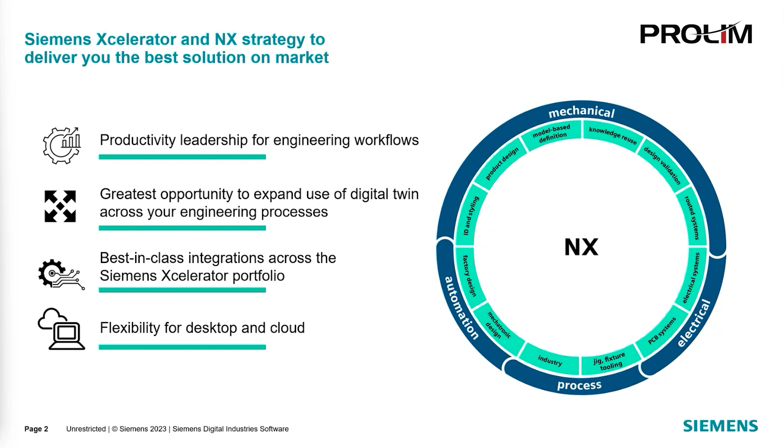So we're going to start off by sharing a little bit of commentary from the market. This is a comment from earlier this year from CIMdata. And this theme of innovation is something I'm going to keep coming back to in my brief presentation here. It's showing how we're continuing to innovate in this space in the service of helping our customers.

So this is a quick roadmap of kind of where we've been and where we're going in 2023. We have a major NX release every 6 months, every June and December. And then we have continuous releases and monthly updates in between. So NX is always up to date with the latest enhancements, new features, bug fixes, and everything else.

We launched NX 2306 in June, and we're ramping up for our NX 2312 launch here in December. As a matter of fact, we're in the middle of our early access program right now in Costa Mesa, California. That's currently happening.

We're also finding ways to innovate and use machine learning and artificial intelligence to improve our productivity. NX was actually shortlisted for corporate innovation in the world's only independently judged AI awards, which are the Alconics. That was a couple years ago. And NX is the only CAD system with an adaptive AI-based user interface. And that user interface adapts and personalizes user interactions, so it makes them easier and faster.

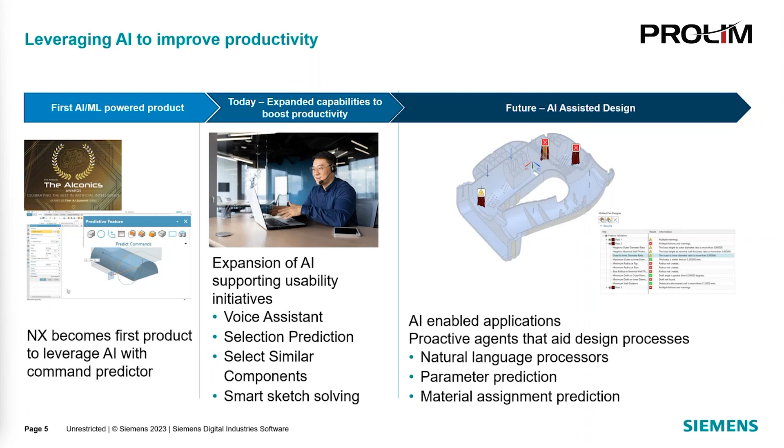Visualization helps to prove the digital twin. It gives you an accurate representation of what your design is going to look like in the real world. So that means better designs the first time and fewer physical prototypes. Siemens Visual Material is our take on a standard physically based visual material that enables consistent sharing of visual representations across all of the current and future Siemens applications.

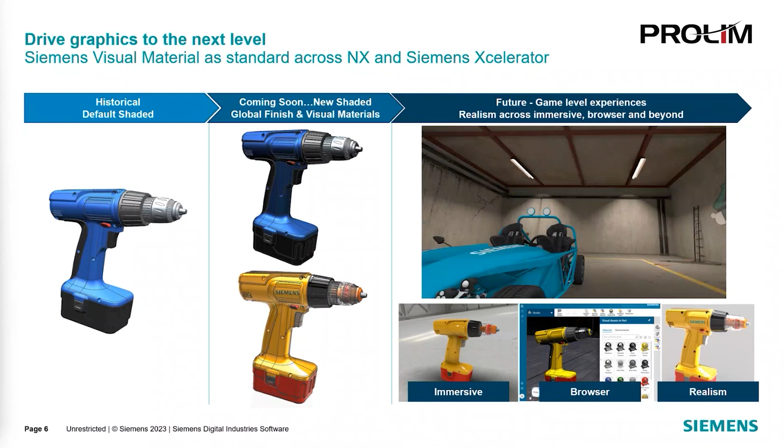And going forward, we're going to bring this high quality visual representation to all the platforms. So not just NX and Teamcenter, but in the browser and even in virtual reality, as you can see in this video here.

So as products become more complex, the need for strong collaboration is only increasing. Electric cars, for example, combine mechanical, electrical, electronic, software, and more with complex cooling and chemistry requirements. So we've progressed from basic check-in, check-out functionality to the point where we currently support real-time change monitoring and notification.

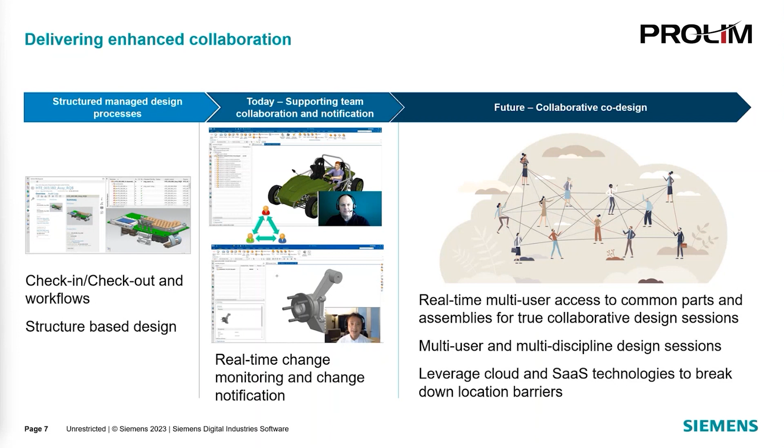In future releases, we're going to support true collaborative co-design, where multiple users will have access to the same parts at the same time. That can include different disciplines as well, so the electrical and mechanical designers can collaborate in real time. We're also leveraging cloud and SaaS to help designers collaborate wherever they're physically located.

As we see it, one of the biggest advantages of NX is flexibility. And that's reflected in our open philosophy that enables you to use the best tools for the job, no matter what, and our excellent multi-CAD capabilities as well.

That flexibility also applies to how NX is deployed. You can deploy it on premises where everything is on site and you manage the setup, updates, and everything. Or you can use our cloud-based option, NX X, where we manage the licensing, configuration, and updates for you. Either way, you're getting the same user experience and the same data format. It's all one NX delivered to meet your needs.

We're also constantly developing new applications using the NX data model. One of the ways we deliver them is through flexible value-based licensing, or tokens. Tools like electrical and mechanical routing, rendering, PMI, human modeling are all accessible from the token pool without having to explicitly buy those modules or those add-on modules.

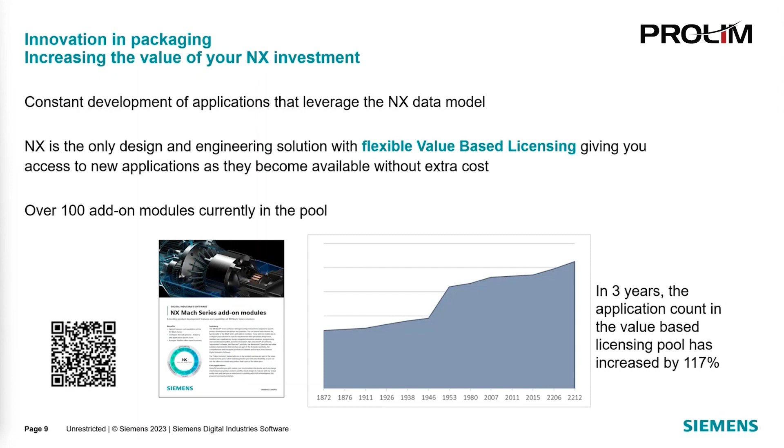That gives you a lot more flexibility than before. You can only run what you need and when you need it, and you don't need to make separate purchases. And you have access to new products from day one. We've increased the applications available in the token pool by about 117% in the last 3 years. Now there's over 100 products in there.

So there's an idea in the market that there's not a lot of innovation to be had in the CAD space. People think that CAD is a commodity, and how much better can you make it? But we've had quite a few patents in the last few years, 25 of them in 2022 alone. So I think we're showing that there's always room for more innovation. Our competitors are not talking about this because they don't have the record to stand on that we do.

We also delivered 519 customer enhancement requests in 2022. So this goes back to the continuous release idea of being able to have access to these enhancements right away. It shows that we are refusing to let our customers fall behind. So if you have a customer that's only a few releases behind, they're missing out on all these innovations, all these enhancements, all these fixes, and everything else. And it also shows that we're listening to them.

So we've seen, again, our competitors are not necessarily listening to the customer as well as they could, and that was a major factor in our recent win with Hyundai Kia.

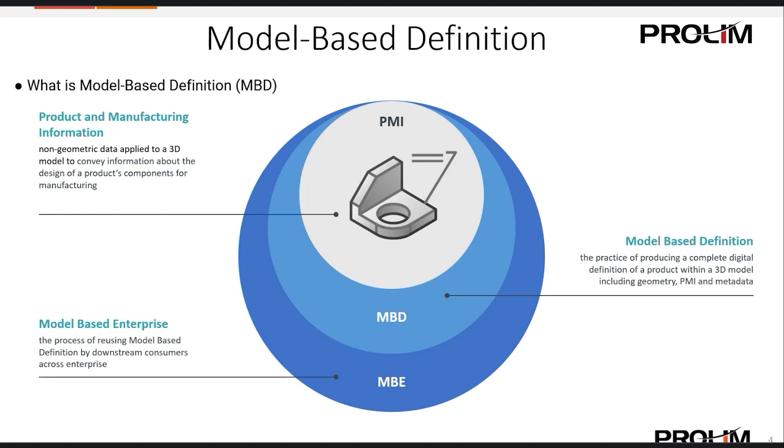So for today's presentation, we're going to be using NX 2306. That is the latest release that was released in June of 2023. We'll be looking at the NX product manufacturing information, PMI. We'll start off by doing some dimensions. We'll do a basic dimension, some hole callout, put some tolerance to it.

We'll then get into some annotation. We'll do a feature control frame, put some datums on it. And then we'll look at a couple little things for supplementary geometry, such as center lines and section views.

Now we're back in NX. Let me go ahead and first show that I am using the latest and greatest. If I go to Help and About, you can see I'm in 2306, which came out in June of 2023. And the first thing I do want to show here is that we now have a new tab over here on the left-hand side, just for model-based definition. So we'll be going in and utilizing this throughout the

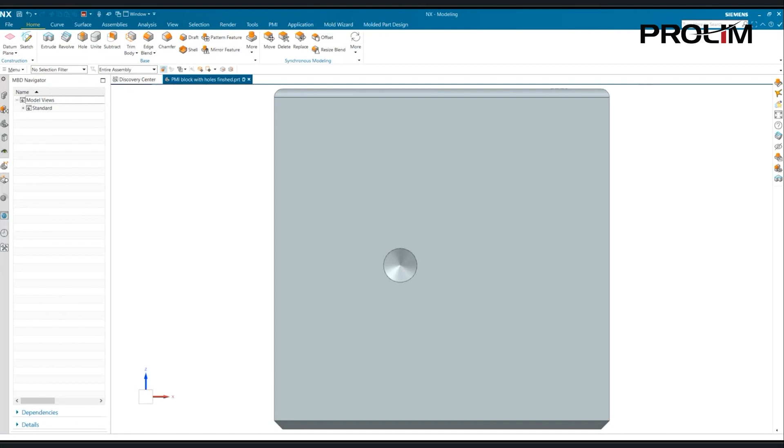webinar here. And you'll see here, it is still done inside the standard views, but you don't go up here into your part navigator and go to your model views here. You actually have this new tab right here that allows you to go in and easily see the tree that you're creating when you're going in and creating these PMI.

Okay, so we're going to be using the toolbar over here, like I just said, and we're going to start dimensioning this out like we would in drafting. However, we'll be doing this in a model view, so we'll be in 3D. So up here in my PMI tab, you'll notice that I have my dimensions here, which if you worked in NX drafting, you should be familiar with a lot of these commands.

We then have our annotation for control, feature control frame, datum feature symbol, and so on. We have some tables that we can insert, some supplementary geometry, such as we can go in and actually add a section view to this. We can do some region, we can do center marks, we can do bolt circles and such. And then if we look here, we'll have our technical data that we'll be adding later on and some rules. And we have a query and advisory here.

I'm going to go ahead and start dimensioning this. The first thing I'm going to do is hit my rapid. When I come in here and do my rapid dimensions, I'm going to come in and select my two faces. I want to select my faces because these are the important ones if you're using this downstream. So here, as you can see, very similar to NX drafting.

The only difference here really is I can pick a different plane if I want to have it on a different plane. Additionally, I'll come in here, I'm going to add some tolerance to it. I'm going to also add how it's placed. Now, if you want any of this to be standard, just like in drafting, you'll go into your customer defaults and your preferences, and you may create a template file. But for today, I'm going to go ahead and utilize what I have here, and I'll show how you can inherit that from one dimension to another.

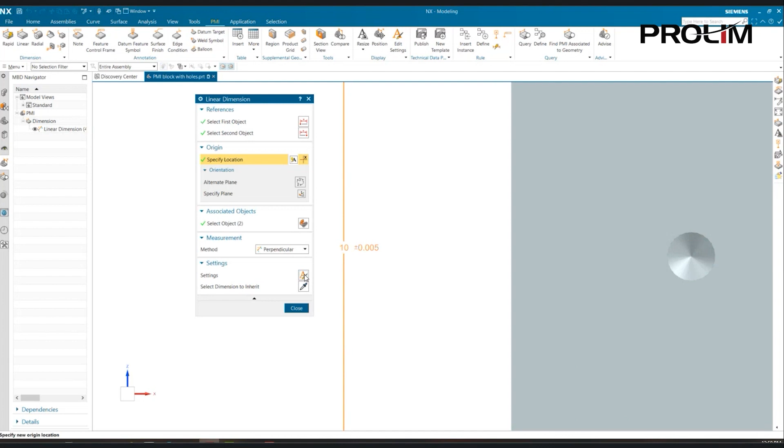So I'm going to go ahead and place my dimension. You may notice that that dimension does not have trailing zeros. That's part of the preferences that you could add. So if I came in here and I went to my settings, I'm going to add the trailing zeros to my part here, and now I have my first dimension. If I rotate this, you'll see that this is a dimension that is in the 3D environment.

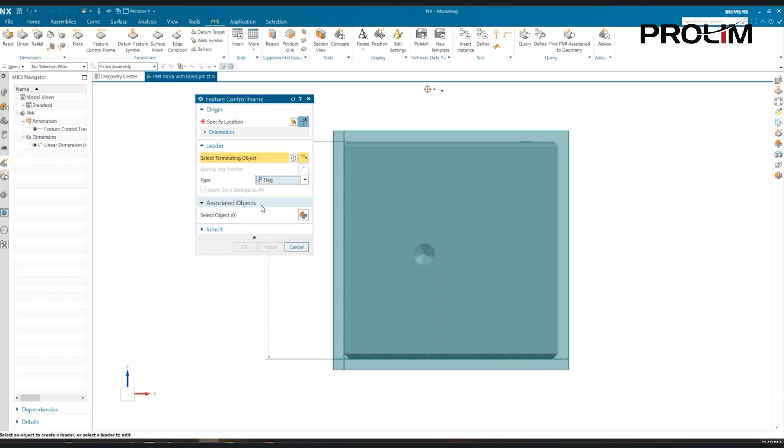My next thing I want to do is I want to add some feature control frames. So I'm going to add some GD&T to this. Now this has changed from the last version. So from 2007 to now, the version has changed a little bit. You will no longer have your annotation in here to go and put your true position, flatness, parallelism, and such. What you'll need to do first is you'll go into your leaders here, and you'll go get a flag, in this case, because I want to flag it to this.

And I'm going to go and place my dimension, I mean my GD&T. You'll also notice, though, because I put it on that particular dimension, it's selecting two objects. I don't want both objects in this case. I just want the bottom face. So I'm going to go and select that. And I'm going to go ahead and rotate this. Let me go ahead and get that rotated properly. Oops, that's my bad. Sorry about that.

Now we have it rotated, and I can see where I'm going to place my GD&T. I'm going to go and place my GD&T in this manner here. And I have not put any of the GD&T yet. All I did is placed where I want my GD&T. Then as soon as I do that, you will get a toolbar up here for feature control frame in general that allows you to go in and put your information.

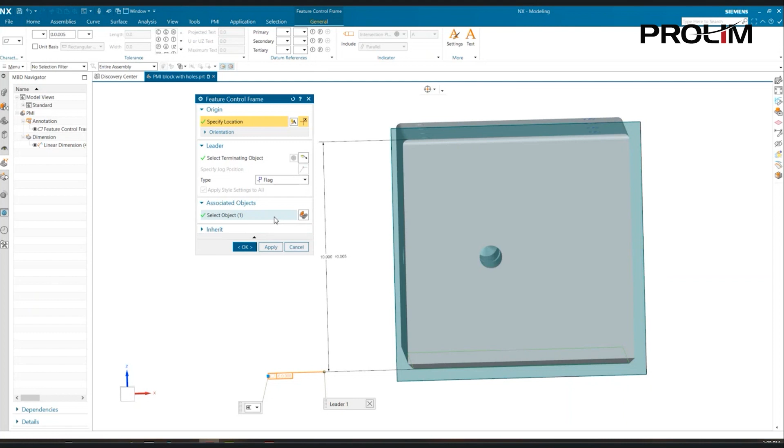So I'm going to pull this down and put a flatness. I'm going to go and actually put 5 thou on this. At this time, if I wanted maximum, or if I wanted regardless of feature size or anything like that, I could add that. In this case, I am just putting a flatness, so I'm going to put 5 thou. If I had a datum reference, depending on what type of GD&T you're putting in there, you'd put your datum reference. So I have my information I want, and I have my face that I want. I'm going to go say OK.

So now I have my GD&T, and I have a dimension. And if I look over here on my MBD Navigator, you'll notice in my standard view, if I go and make this a little bit larger, you'll see that my feature control frame is now here, my annotation, my linear dimensions. If I go to dependencies, it would tell me what is dependent on that. So you can see associated objects, my 2 faces in this case, and it lets me know that that's in the front.

I'm going to continue on dimensioning this out, and I'm going to add some datums to it. So let's go ahead and look at my datums here. Here's my datum feature symbol. I'm going to go ahead and reset this, and I'm going to put datum A in here. So let's go ahead and put A. And I have my leaders here, so you have your different types of leaders that you can put in there.

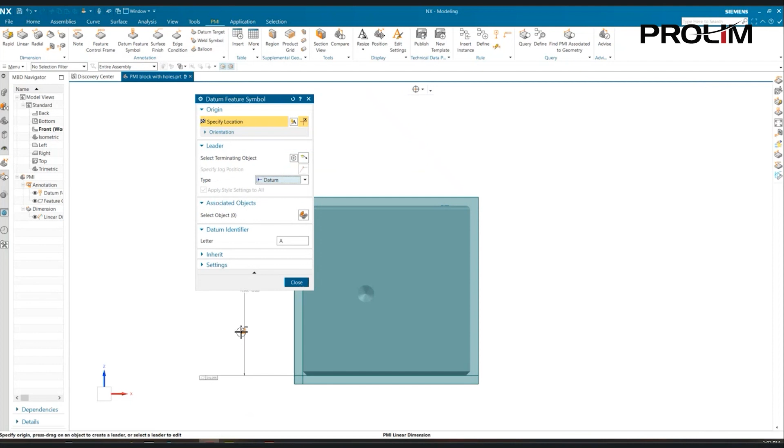Once I have what I want here, I'm going to go ahead and select this particular feature control frame, and I'm going to go and place my datum. So now I have my datum that's also under my annotation. If I double click on that, it automatically selects the bottom object for me because it's going in and selecting my feature control frame. So now I have a dimension I've added, a GD&T I've added, and a datum.

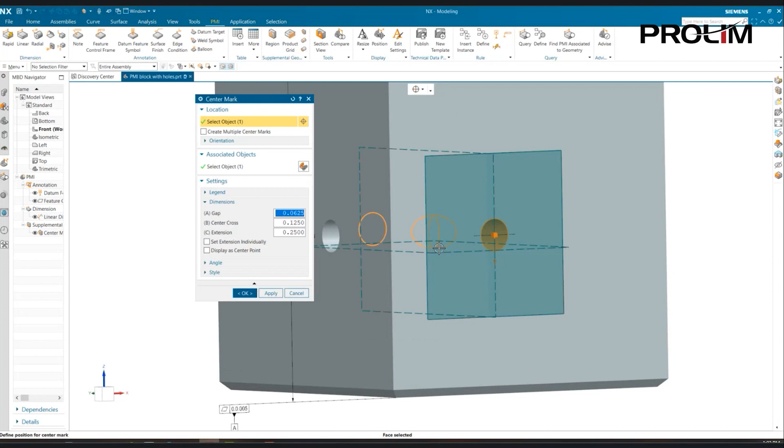Next, I want to go in and maybe I want to dimension the hole there. So with that hole there, first thing I'm going to do is I'm going to go and center mark. I'm going to select my object. Notice I have different planes I could put that on, but in this case, I like where it's at. I'm going to say OK. Next, I'm going to come in and get another dimension. So here I'm using my rapid dimension again. I select my center mark, select my face.

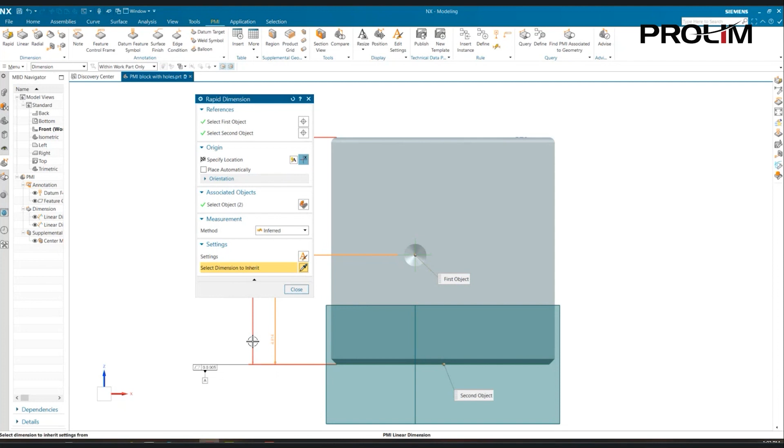And this time, when I go to place it, I'm actually going to say I want to inherit this other dimension. And notice that it gives me the same tolerance, gives me the trailing zeros and everything else. However, maybe I want to put some GD&T to this, maybe I want to true position that hole. I'm actually going to go in and say, I don't want the tolerance. I just want to put a basic dimension on it. Place my basic dimension, and now I have that hole started to be dimensioned.

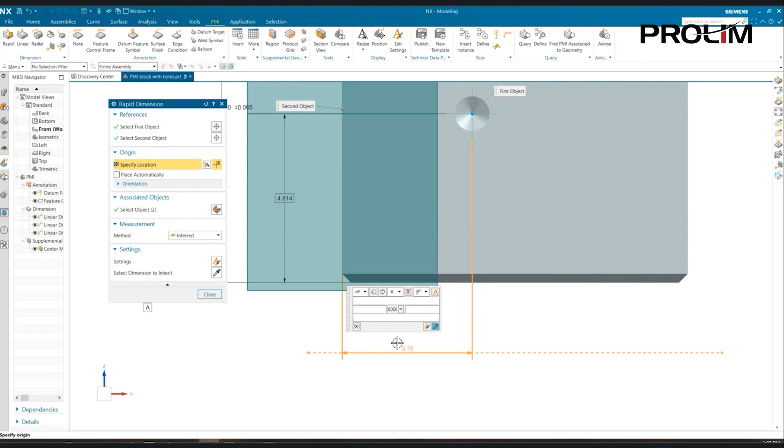Once I have all that information, I can continue on and dimension this the rest of the way out. Let's go ahead and do that. I'll go ahead and put my other dimension here. Whoops, that's my bad, I selected the wrong object. Let's go ahead and reselect my object here. And I'm going to go ahead and select this face here. Place my dimension. Let's go ahead and inherit this information, and place it. And now maybe I want to put another dimension in for the size.

Again, I'll go in and inherit my information. Now, if you have this set up in your preferences or your customer defaults, or if you have a template file, a start part or whatever you like to call it, you wouldn't have to keep doing this. In this case, I'm out of the box.

Now let's go ahead and put another feature control frame. This time I'm going to put another flag on it. I like that. I'm going to select this edge and pull it down. Once I have where I want to place it, you'll get this toolbar up here.

In this case, I want to have a true position. So I'm going to go ahead and do a true position. We're going to leave it at 5. I'm actually going to put a diameter on that. My primary datum is A, let's say. My secondary is B, and my third would be C.

So now I have my true position there. Well, in this case, guess what? I did it wrong. I want to have that perpendicular, not a true position. So you can always come back and change that.

I got ahead of myself there, actually, and tried to put true position on an edge. In this case, I wanted to do the hole like that, but that's all right. I went and quickly changed this.

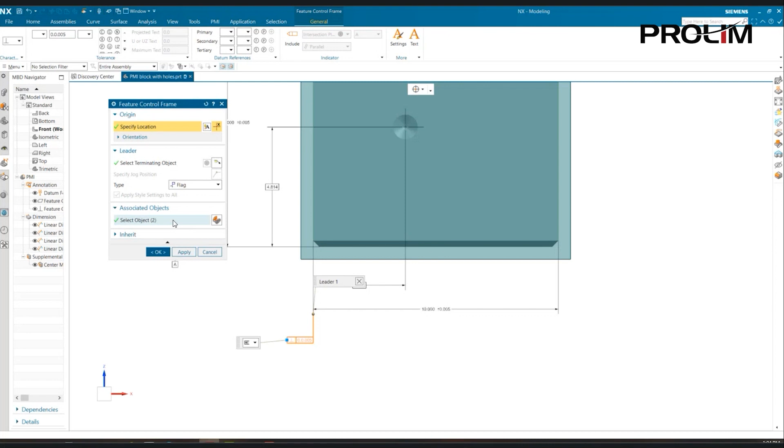And once again, if I say select objects, you'll notice that it picks both faces. In this case, that's not what I want, so I'll go and deselect this one, and I'll go and place my perpendicular. So I have my perpendicular placed, and you can see here over in my tree, it continues to build.

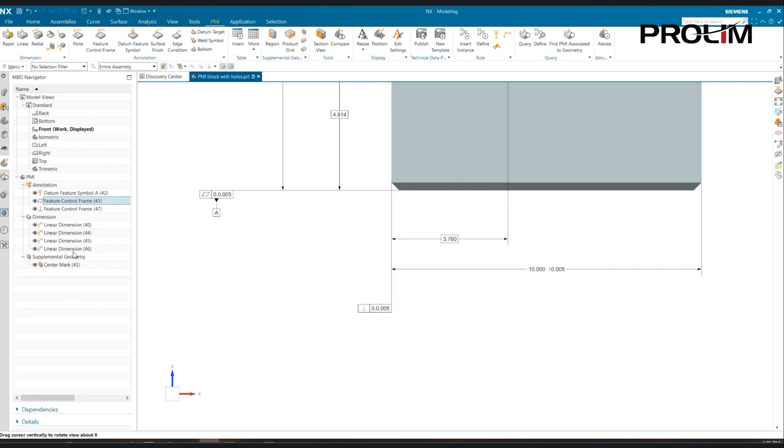And if you want to at any time see where that is placed, you can go in there and you'll see the status. That status lets me know that there's PMI in that particular view. And as I showed earlier, the dependencies will show you more information, the associated object and the model view, and also what is maybe stacked to that.

We'll go ahead and continue on this. I'm going to go and make that a datum myself also. We'll go and make that datum B. Actually, reset that real quick and go datum B. Take my leader, select my object, place my datum B.

So now we've gone in and we put some basic dimension. We put some dimensions over all sizes with some tolerances, some GD&T. And next, maybe we want to put dimensions for the hole there.

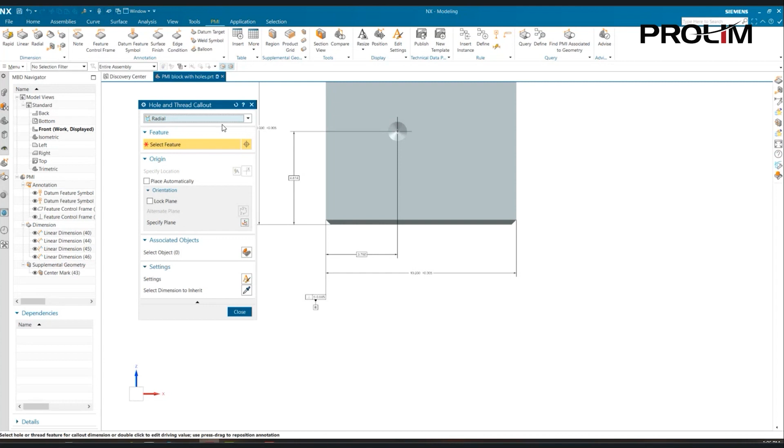So up here, we have hole and thread callout. Much like the drafting side, I'm going to go ahead and pick that. I have radial or linear. I'm going to go ahead and say linear - I mean radial in this case. Pick my hole, and once again I go and place it. And you may notice that may not look like you want it. That again depends on your preferences or your customer defaults that you may have.

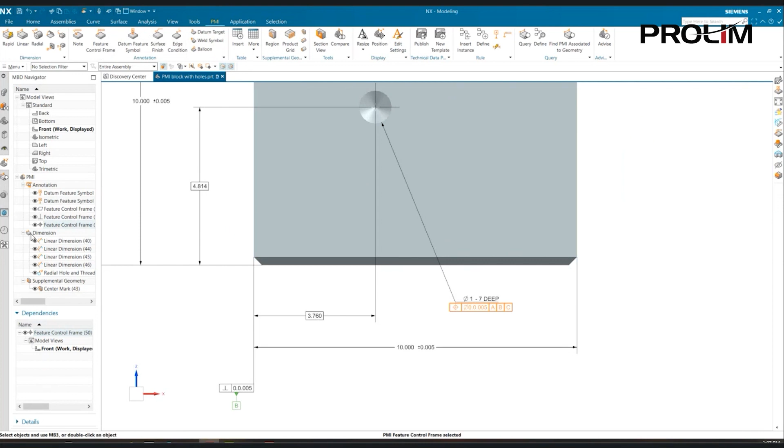Now I'm going to go and put that other GD&T for the feature control frame. In this case, it will be my true position that I tried to place earlier. And we'll go ahead and put that information in there. You can quickly see if I select on that, I can always come back and quickly double click on it and change that information, such as what I did earlier. So now I have this pretty good and pretty detailed out, pretty decent.

So we've gone in, we did our dimension with basic dimension. We did a hole callout, some annotation, feature control frame and datum feature. And then we did a supplementary geometry with our center line. Now what we may want to do next is, if we look at this, we have two holes here and they intersect each other. Maybe we want to have a section view.

So if we come in here and say section view, notice this section view is very similar to what you would have if you were in model and if you've ever done any section views in there. And here I can pick my different planes and such, display, cut, plane and everything else, cap settings.

I'm going to go ahead and rotate this, and I'm going to get it in the orientation I want, because this is going to be saved as a model view. I'm going to go ahead and OK this. And now if we look at our section view here, we got our section view.

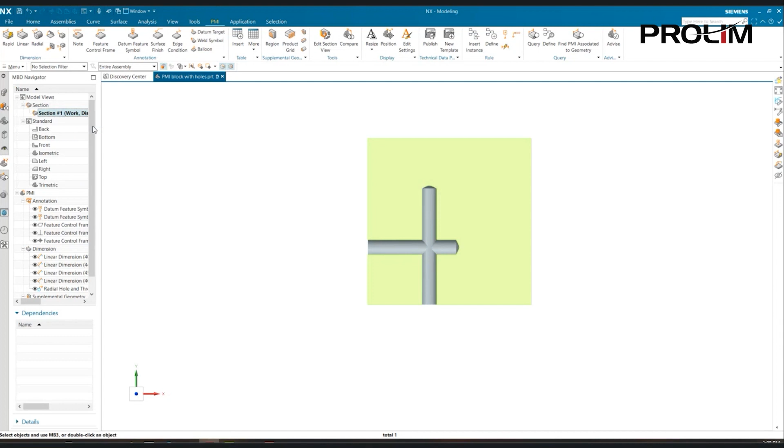If I wanted to add cross section to it, we can go in and edit the section view here, or we go into the settings and display the cross hatching.

Now, as I said, this is done in model view. So if I go back to my front, you'll notice that inside my front there, you have your dimensions, your GD&T and everything. At any time, if I wanted to move these, I could go and say, let's put this in another view. I have the ability to navigate to the view, display in views, display in all views, so I can move that to any view I want.

Now that we talked about what model-based definition is, MBD, and we've also talked about product manufacturing information, PMI, we went in and showed how to dimension some basic dimensions. We showed a hole call out. We went into annotation, did some feature control frame with GD&T, and then we put some datum features. Additionally, we showed some supplementary geometry with the section view along with the center lines.

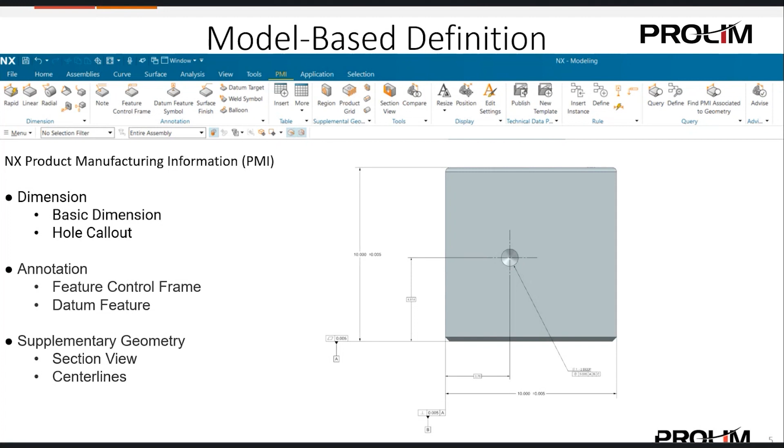Moving on, we're going to start looking at search and report. So we're going to look at MBD query, and we're going to look at a text base. In this instance, you can go in and type in what you're searching for, for example, in the example I show on the screen here, datum feature. Or you can go rule-based. You have certain rules that come out of the box, and then you can recreate a report from this.

Once we do that, we'll go in and find some PMI associated to the geometry. This creates a temporary view that shows you what PMI is linked to which geometry. Then we'll go on and use the advise, which is on the next slide here. I'll show you that when we get to it. And then we'll go to the compare, which is on slide 8.

So now let's go ahead and jump back in NX and start going through some of these. Now that we're back in NX and I have my model up here, let's go ahead and look at the MBD query first. MBD query can be found over here in our resource bar on the left-hand side.

The first one we have is text-based. So within text-based, I can put different information. For example, I can say datum, datum feature. If I say datum, you will see now that it brings up the information here and highlights it on the side.

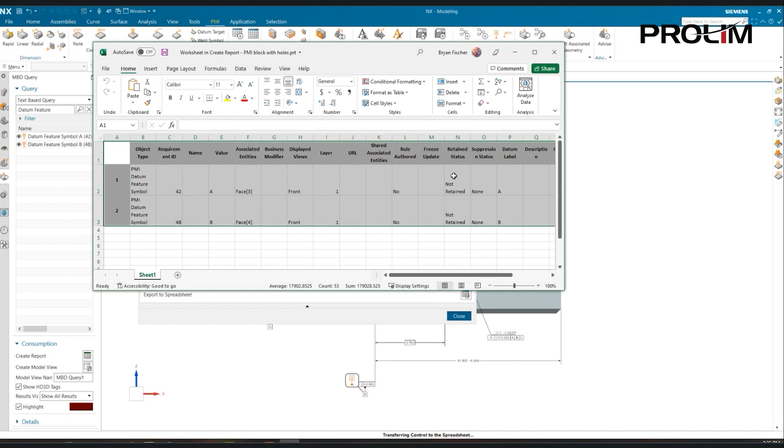Additionally, we can go and create a report. When we go and create a report, we have different information in there. It tells us what face it's associated to and so on. And if we prefer to, we can actually export it out to a spreadsheet. When we go to export this out, it will put it in an Excel spreadsheet. Within that spreadsheet, we have information we can look at - different columns, layers, rules, different things such as that. It gives us a datum label and so on. So this gives you a report that you can go and actually share with individuals.

I'm going to go ahead and close this one. Give it a second to close the Excel.

And the next one we're going to do is let's look at our rule base. So rule base, we have several different ones that we can look at - find dimension, find datum, surface finish. These are all out of the box. So I'm going to go ahead and say find dimension.

It's going to ask me which ones I want. Dimension value, I can actually put a value in there if I choose. So if I said 10, for example, that's only going to find the dimensions that are 10. So from here, I'm going to say OK, and you'll notice that it highlights my dimensions that are 10. You can create a report from there, and you can also create a model view from there. So that gives you the ability to go in there and quickly do a query on your model.

Next, we're going to go in and actually do a find PMI associated to geometry. First thing we want to do is remove this report that we just did. And I'm going to come up and go into my navigator here. Over here on the right-hand side, we have find PMI associated to geometry. From here, I can select.

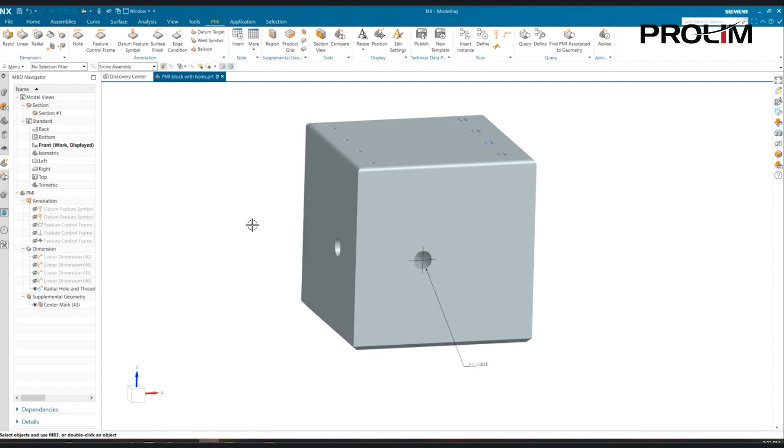Let's just say, for example, I wanted to find PMI associated to this hole. I can create a query result view here if I like, and I can attach to PMI also. So let's go ahead and just say OK for this one. It tells me it creates a temporary display for me, and notice that it only shows the information for that particular geometry. Now you may ask about where's the dimension - well, those dimensions are actually attached to this particular crosshair.

So if we say find associated geometry again, and this time I pick the crosshair, you notice that it will find that. And again, that crosshair is associated to the hole. So that's a quick way that you can find what PMI is associated to which geometry.

So the next portion of this, we're going to jump into what we call PMI Advisor. This check will actually go in and check your geometry for you and your PMI. For example, if you did not have a tolerance on a dimension, it will let you know that. If you're missing a datum reference, it would also let you know that. So let's go ahead and jump back in NX, and I'll run a quick one of these and show some of those examples.

Okay, so we're back in NX here, and I want to run an advisory on this. So up here in the right-hand corner, in my toolbar, you'll notice we have this advise. It validates PMI using the current configuration rules. These rules are set by whatever rules you have for your customer default for that particular file. For example, your GD&T is set to whatever ANSI standard and so on.

So here I have my advise. I'm going to go ahead and select that. And once I run it, notice I get a couple errors here. Now I did these on purpose just to be able to show some of this.

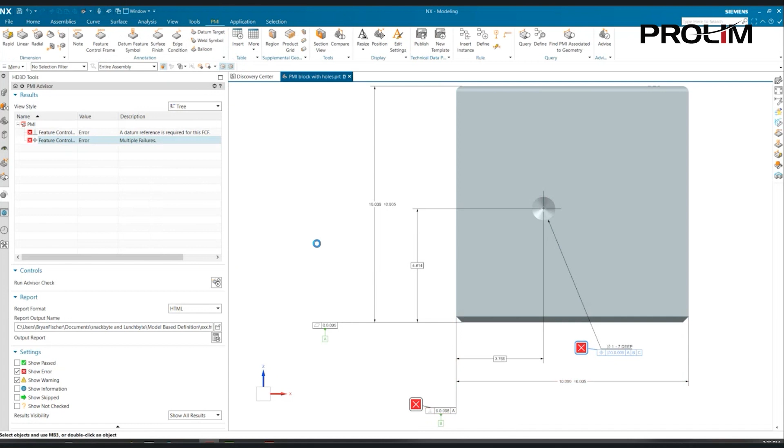Next one here is, notice there's no geometry to it, so I'm going to go and select this hole. Now, datum C is not there, and I have not put a datum C yet. If I came in and quickly just put a datum C - oh, I'm sorry, I hit the wrong one there. That's a datum that allows you to do your A, B, and C all at once. I meant to hit this datum feature symbol over here, and I'll show an example of that next.

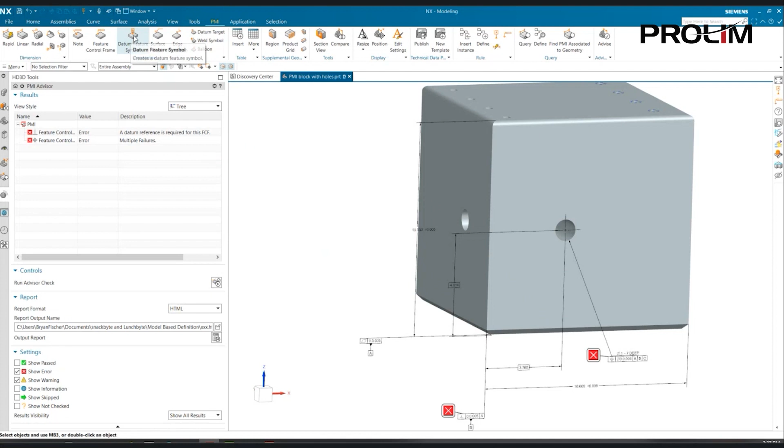But right now, let's go ahead and put this in. And I'm just going to put it on that face. So now I have a datum. Now that's not necessarily the way I would place it, but this is just to show you that it will go through these checks and find these checks for you now.

So I'm going to go ahead and advise again, rerun it, and notice I get no results now. That's because it recognizes that I have this set up properly. It may not be pretty like a drawing, but I do have a datum C that's associated to that face now. And I also went in and fixed the other GD&T.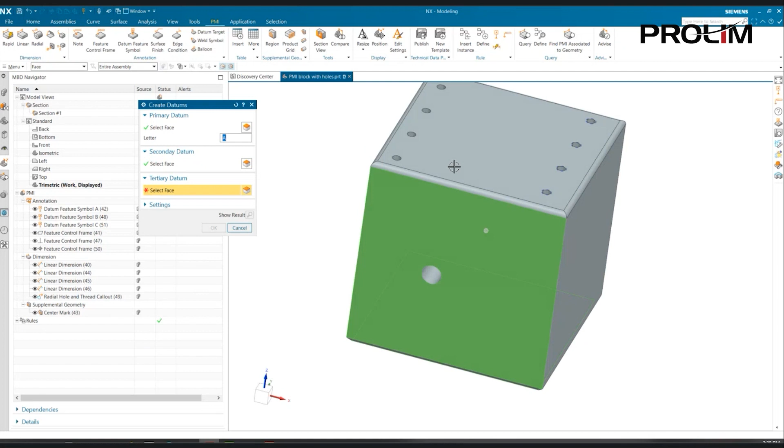Now, I talked about just a second ago how I accidentally went and selected that additional one over here that says datums. This creates your secondary, primary, and third, and you can do that quickly just by going like this. Select datum A. In this case, we had our bottom, datum B, and datum C. It will go in there and actually create them for you in that manner.

I do not prefer that manner myself. I like to make it a little bit prettier than that and like to put it in the views. And I think that's partly because I'm an old draftsman and I had worked on the board for a very short time, but have done a lot of traditional drawings. Neither way is wrong. It's just a different manner of getting to it.

Now, the next portion of this, we're actually going to go in and do a compare of two different revisions. I'm going to go ahead and close this one, and I have two models that I already have that are going to be used for that, two different revs. There have been some slight changes between them, and we'll go ahead and show that. So within the PMI compare, it will go through and look at your source part and your comparison part, and then label the differences between the two.

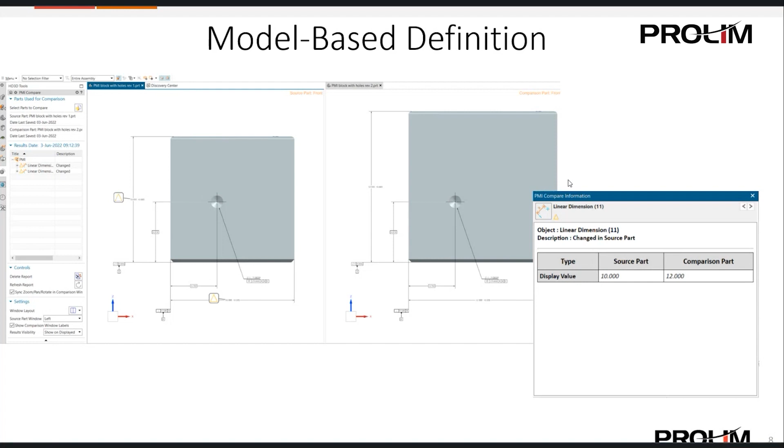So here we are back in NX. As you can see, I have a model for Rev 1 and I have a model for Rev 2. What we're going to do is act as if we're going in to look at these two. First thing I want to do is go into my PMI and see what the two different changes are. I'm going to go to my compare under the tools here. Compare PMI and model views between two different parts or revisions.

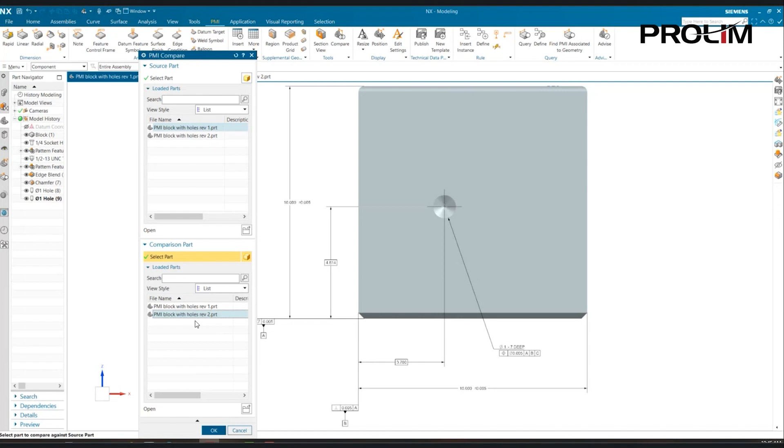As soon as I hit that, it's going to have my source part as the part that I currently have open. If I didn't have it open, I could also search for it if I needed to. And same with my comparison part. For my comparison part, I'm going to go ahead and select my Rev 2, and say OK here. And now it's going to tell me the difference between these two models.

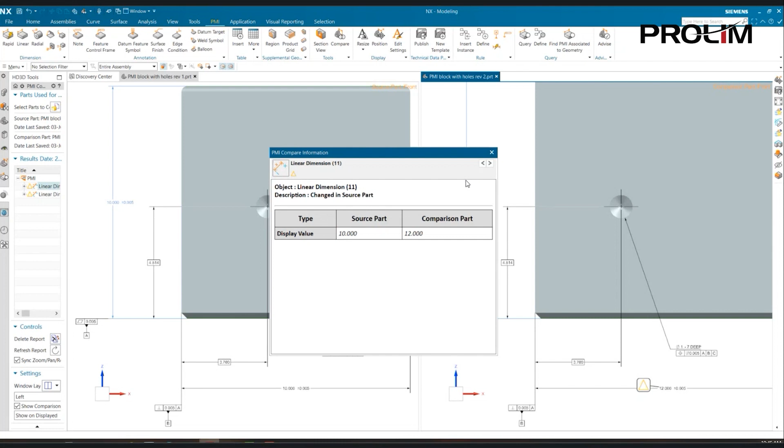So you can see over here, when I make this one my work, it lets me know what the difference is. And if I say compare information, it tells me what has changed. So this is a nice tool that you can quickly use to tell the difference between one rev and the next. It also has information over here that lets you know the source part, comparison part, and what the change is. You can create a report if you like. You can do different layouts for the windows. Additionally, it gives you the last saved date for each one.

So this is a great tool for anybody that may be going back and double checking different revs. So if you're a checker of any type, or if you just need to make sure that the change has been made. This PMI compare is a very nice tool that makes it a lot easier to redline drawings.

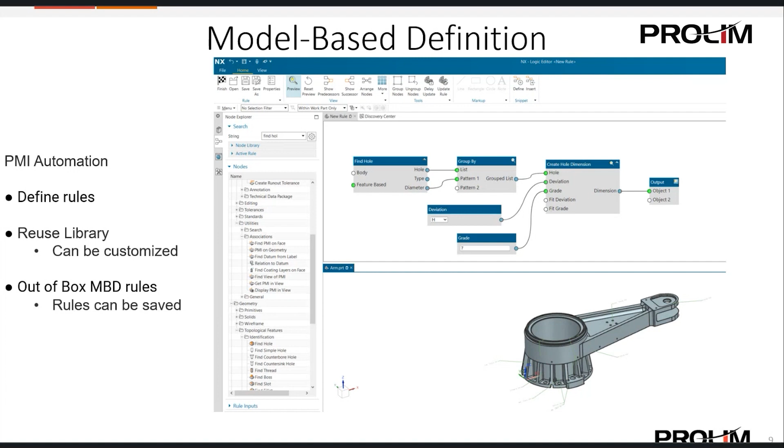Next, we're going to be going into some PMI automation. I'll show you how to define rules. I'll show you how to use the reuse library. And then we'll talk about out-of-the-box MBD rules and how they can be saved. So back in NX here, I have a model, and as you can see, this is a body. I'm going to go in and actually add PMI to this. I've already created a rule, and I'm going to go insert this rule.

After I insert it, I'll show you how we can create this rule and how it can be utilized. So up here in the instance, I have all my rules that I have already created or that are out of the box. In this case, I have an MBD logic rule that I've created for holes. When I select this, you'll see that I can create hole dimensions, I can change the deviation and grade, and so on. I'm going to apply this, and as soon as I apply it, you notice it adds the PMI for me. Now I'm going to undo this, and we're going to create this together.

So we're still in PMI, and this time I'm going to go to define instead of insert. From here, I have several different options. I can go through all the nodes if I like and find what I need. Or if I already know what I want, I can do searches on them. For example, if I say create, notice it gives me a list, and I can start getting this information. So let's go ahead and find a create hole.

Actually, let's just go ahead and type it in, create hole. You'll see right now, I got a create hole dimension. From here, I'm going to go in and actually place this over here by inserting it. And this is the beginning of our rules. So I'm going to go ahead and continue to create my rules here.

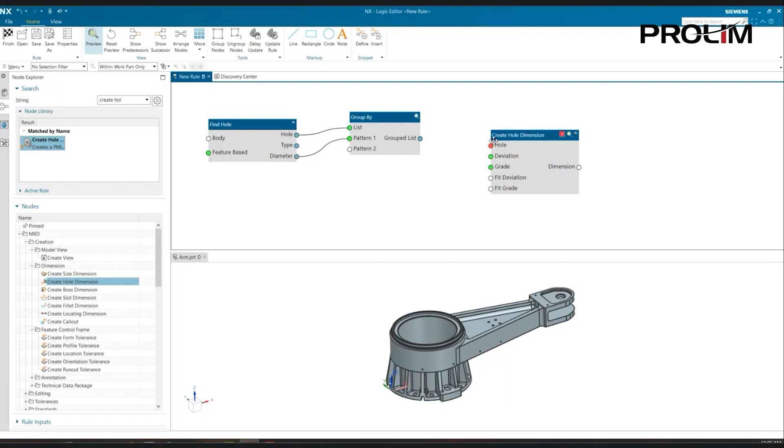I'm also going to go ahead and create a dimension from here to here. We're going to create a path. And then from here to here. So you can see it's pretty quickly done. And once you understand these rules and how to utilize them, you can set these rules for your whole company, and your designers, draftsmen, or whoever can utilize these to actually go in and quickly create information.

Let's continue and fill the rest of these out and put the rest of these boxes, and then I will show you how we can save this and utilize it. So we have our deviation here. I'm going to go and create another input. The deviation, I can tell which deviation I want. Grade, I'm going to create another input. And we get our grade there.

And last, I'm going to go and actually put my output here. And from there, now I have my rules saved. You can see once I put the output in that these dimensions are now on the particular part. So let's go ahead and finish this. Actually, let's go ahead and save this. And this time I'm going to go and save it as a new rule. We'll call it hole 2 this time, just so we know the difference.

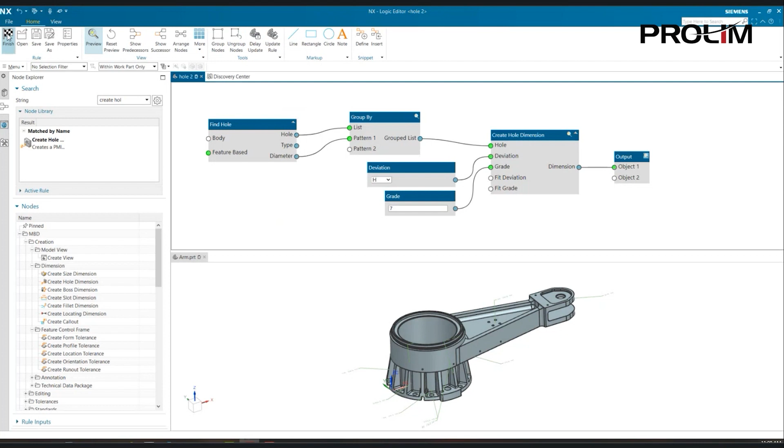Now, if you came into a fresh part, you now have the ability to go into insert instance, and you can come down, find your hole 2 logic rule, and apply that. Now, these rules are saved within the program, in whichever revision you're in, under MBD logic rules. I went and copied my 2007 rules over, and this allows me to reutilize those rules I've had.

Now, out of the box, you do have several different rules that you're able to use. You can create datums, you can create, let's see, dimensions, different baselines, convert to basics. So there's a lot of different rules that you can utilize that are already out of the box. So that will allow you to go in and have your users be able to use the rules and bring this information over pretty quickly.

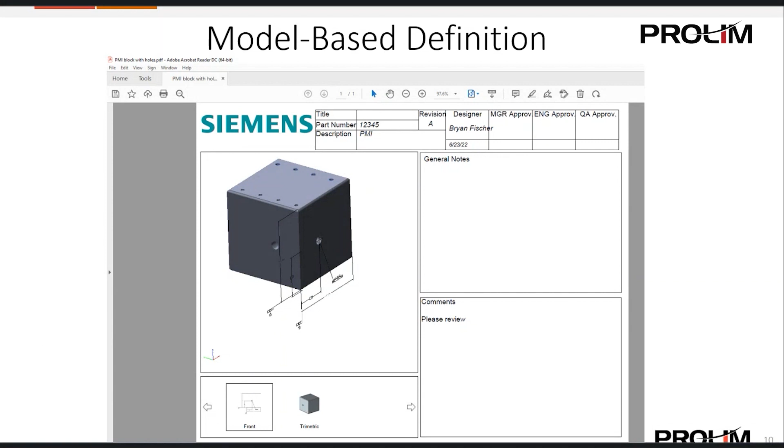For the last part of today's webinar, we're actually going to go in and do some technical data. Here you can see a 3D PDF. We're going to jump back in NX and we're going to create this together. All right, so we're back in NX and I have my PMI block that I created. And within our PMI tab, we have this area for technical data. We're able to publish it here. These are out of the box, but you can go in and create your own under new template.

For today, I'm not going to get into that. We do have another webinar and video that shows that. But for today, I just want to go in and show how we're able to create these 3D PDFs and how quick and easy it is. So here you have your different ones that are out of the box. And I'm going to go ahead and pick one of these. Let's go with the landscape one. Let's go with the part landscape.

So here you have your selected views, all disclosed views, all views. Let's go ahead and say selected views. I'll come over and pick my views that I want. From there, I have my area where to save this. I'm going to leave it where it's at right now because it's going to go in the area I want it to be. And then we have up here new additional tabs. You have your text, so you can put some text in there. And we'll go ahead and put some information.

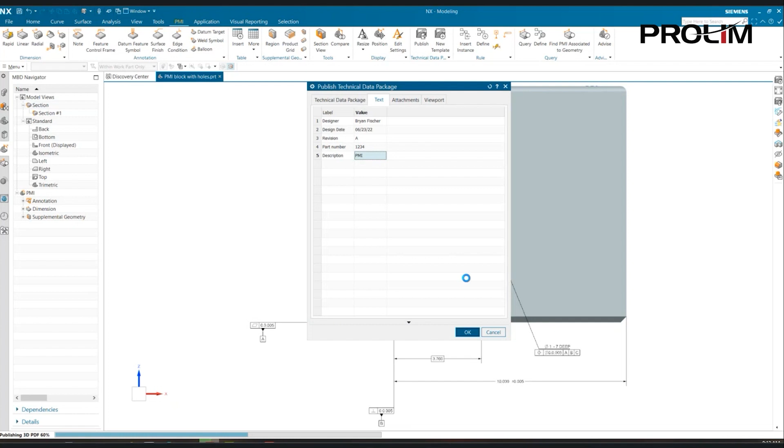And then we'll go ahead and apply this. Now, I'll go in and open up my PDF, and now you can see we have ourselves a 3D PDF. I can rotate this part. I can switch to different views. I can put comments in here.

And now we can send this off to an individual that may not have NX or have a CAD program, and they can go in and utilize this information.

So now we went through all these steps. We talked about what is model-based definition. We went in and did some PMI, product manufacturing information. We did a PMI validation. I showed how to do PMI search and reporting. We did some automation. And then we went in and did some authoring here with our 3D PDF. So that wraps up today's webinar.

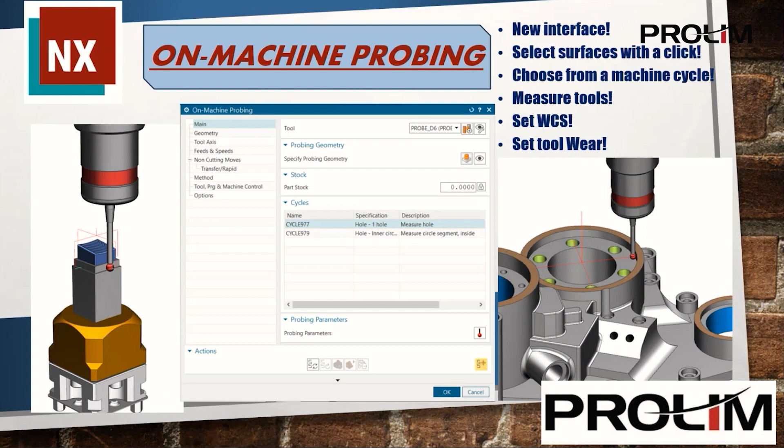My name is Keith Schultz, and I'm going to be covering a little bit about NX CAM, their new probing interface. Let me get my screen shared here. All right, so NX CAM has a new on-machine probing module, and we're going to be talking about that this morning. This is going to be an overview of use, and we're also going to look at getting some additional features to download in NX from PostHub, such as the simulation and the post-support layers.

So this is what we're going to talk about. We're going to look at the Siemens Sinumerik side of things. So on the Fanuc side, there's more features, and we decided to give that its own showcase later. So this is going to be a brief informational presentation to let you see the new interface, and we encourage you to download it and play with it yourself.

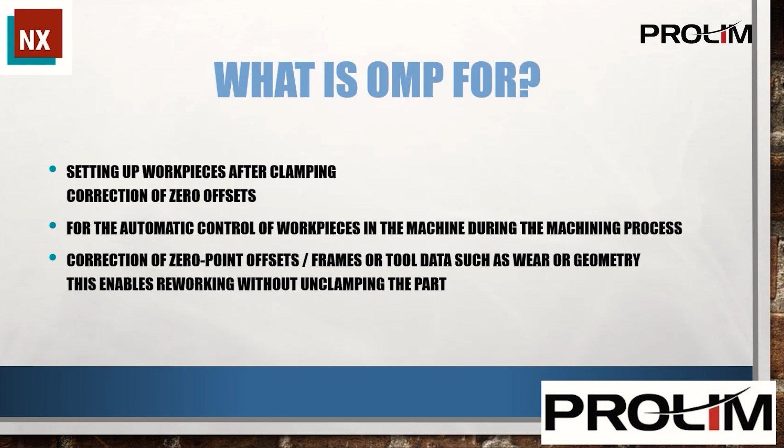All right, so what is OMP? So most of us have probably heard the term probing, and most machine tool manufacturers have provisions for probing. And automated tool setting is the standard for setting our tool offsets. So while NX is not new to probing operations, this new module will help you streamline your programming workflow. So no longer do we need to generate each move separately. So OMP is exactly what it sounds like. It's measuring a feature while it's on the machine tool.

So why use it? Why use OMP? So if you want to digitally expand your machine shop, you can become more effective, efficient, and profitable. A digital shop provides powerful advantages, including reducing our turnaround time. We can deliver high quality parts on time by predicting and eliminating errors by using a digital twin of your part. And we can expand and grow our business by implementing new automation technologies. So probing critical dimensions in our workpiece can reduce our scrap rate by allowing us to measure and adjust processes while the workpiece is still in the machine.

So what does a digitalized workflow for our part look like? So it might look like this. We can probe our tool to check for breakage and update our wear. We can then probe our stock to check for errors in setup, operator or robot tended. And we can make fine adjustments to our work offsets, and we can use logic if it's off enough to throw our operator an error and get that some special attention, right? So after machining, we can probe critical dimensions and adjust our process and have an automated rework process, or we can write logic to alert the operator again.

But in the long run, we can also capture this data and follow the trends for tool life. We can use that to keep our process under predictable control. So instead of switching to a backup tool once we detect breakage, we can determine that, after so many parts, we probably should switch to our backup tool.

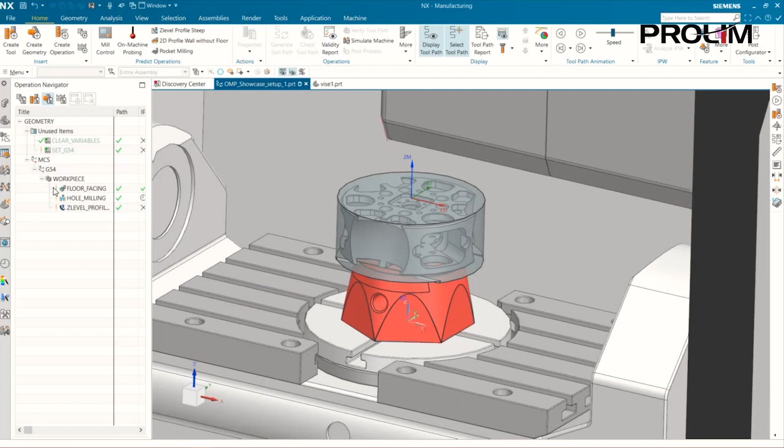So I have my part set up here, and I've determined our workpiece. I'm using the master model process as well. We have our part defined, we have a blank model we brought in defined, and we also have some check geometry. All necessary steps whenever you're setting up an operation.

So first thing we want to do if we want to start probing is create a tool. You see this automatically comes up because I've used it recently, but you can see we have a probe option here. We can make a tool ourselves, or we can select a tool from our library. Those are located in the solid tools in the probes, and you can select between your different library units.

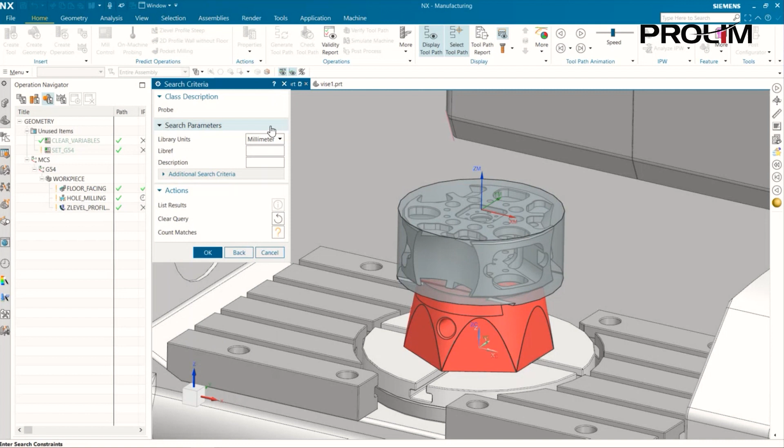And when I say OK to this dialog, you'll see that 2 probes show up, and we can select one of these. Now, if you have to create your probe, you're going to have to give it its mounting location, the length from the mounting location, and you're going to have to identify the tip.

All right, so now let's create an operation. I'm going to switch over to my program order view, and we're going to start creating an operation. I already have probing set up, but you can see that's going to show up over here in your type. And I'm going to put that into our probe work offset. This will be one of our first operations we do. My tool is a probe, and our geometry is going to be workpiece.

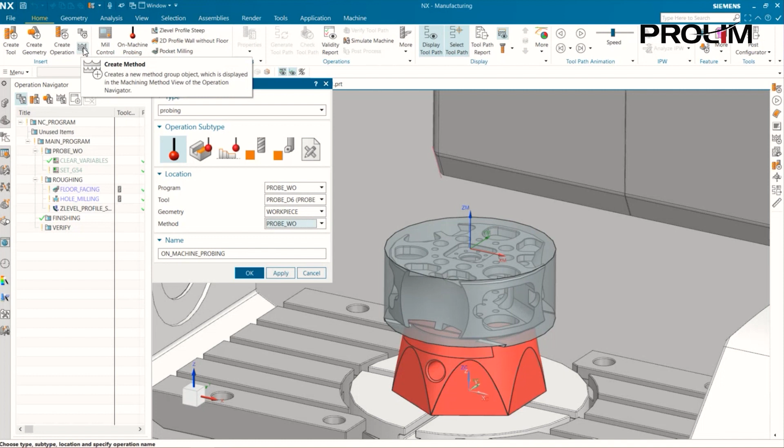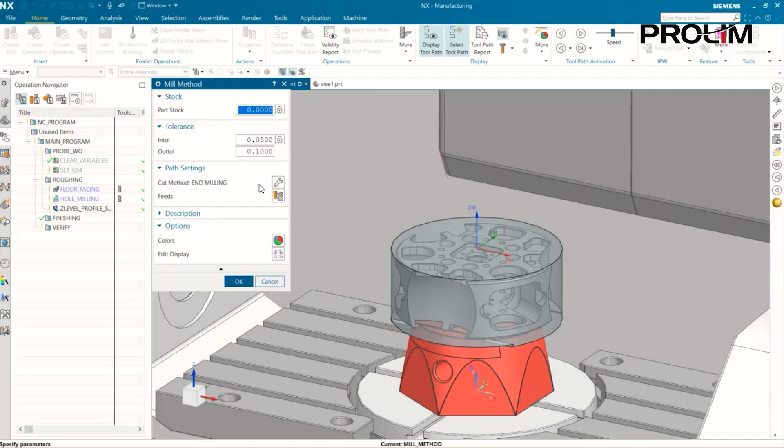And we're going to use a method here, and this might seem a little different to you. I've created a method, and I'm going to show you real quick how we use these methods in probing. If I come over here to create method, what you see in here is we can have our tolerances, and we can also put our feeds in here for our probing. Depending on what type of probing you're doing, if you're just locating stock and setting your work offset, you might not need a very small tolerance. You might need a bigger tolerance. But if you're programming to look at a feature and make sure it's within tolerance, you might want to change these numbers to whatever your tolerance is. So that's how that works.

All right, so we have all of our 4 parents populated, and we're going to name this operation our find Z. Very common thing we do first. Select OK, and we see the new dialog box. So this is how the workflow works: we're going to select our geometry, a cycle is going to show up, and then we're going to hit our probing parameters, and that's where we're going to do our changes to our cycle. So for now, I'm going to select this top face of our stock and OK. And here we go. We can see 3 cycles that show up.

And if you hover over each one, you'll get a description and a cycle number, which is also over here, of course. There's a single edge. There's aligning a single edge. And there's aligning a surface to a plane. So right now we're just trying to find and set Z.

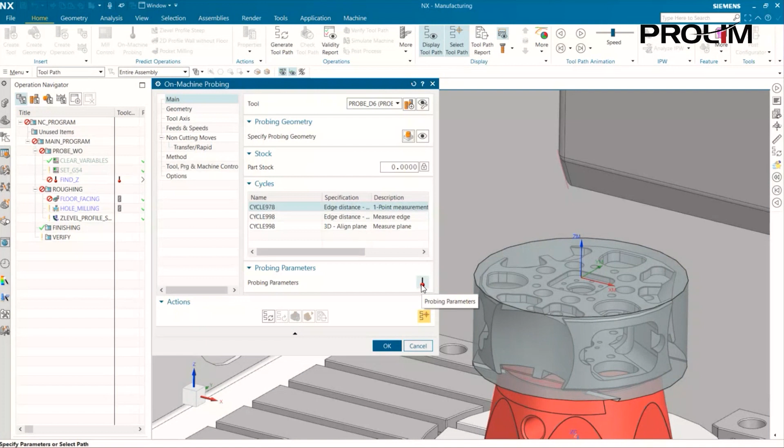We're going to stay there, and we're going to go into our probing parameters. So looking here, we have a whole bunch of locked boxes. Let's unlock some of these and see what we have in here. Set them all to user defined. And the first property to do is a measurement point. Right now it's going to be the center of the part, but I'm going to just move it off the center of the part just so we can see that the tool path has already been created.

And we're going to select our offset target, and we're going to put that as our work offset. You see a couple more windows open up, so let's go ahead and unlock those. And we have a few options here, either our active work offset, or this is for kinematic control. And you can see that we have all the available options there for the controller. I'm going to select G54. All right, we're done there. I'm going to select OK and generate the operation. And there you have it.

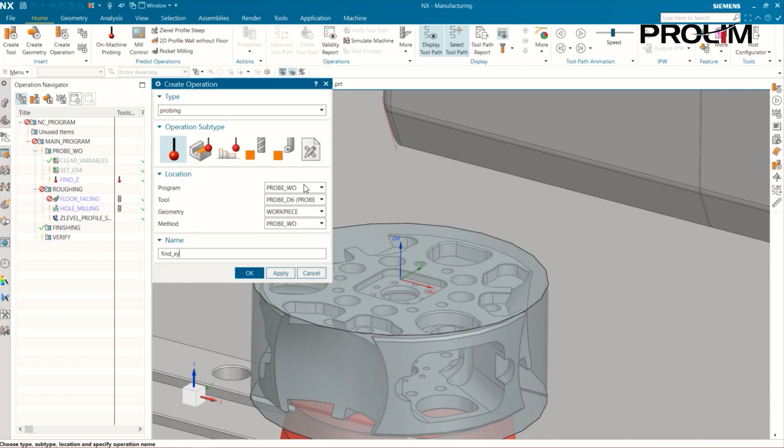So the next thing we might want to do is find the center of this stock in X and Y. So we're going to create another operation. We're going to call it find XY. And everything else is going to be the same. The program is going to be in our probe work offset subprogram. We're going to be using our probe again, and the workpiece, and we're going to use our probe work offset method. Once again, the same workflow applies.

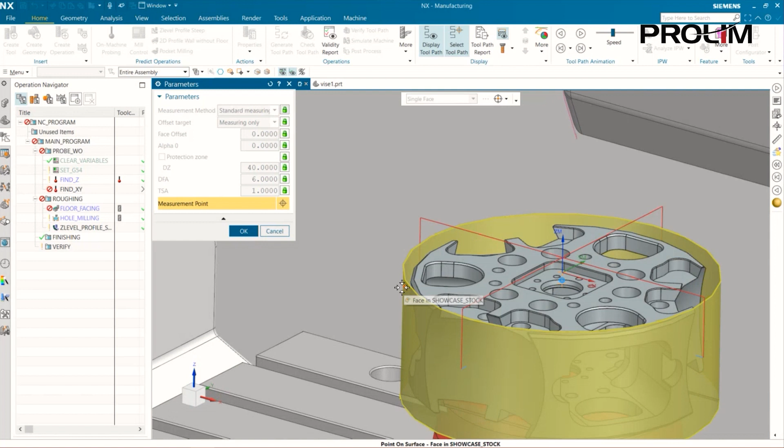We're going to specify our probing geometry. It's going to be outside of the cylinder, and it'd be the same thing if your stock was a rectangle. You'd select all 4 sides. Select OK, and I'm going to get some options. So we have a spigot, cycle 977, or we have a spigot with just an auto circle segment. We're going to select that first one and look at the parameters. And you'll see the first thing that comes up is this measuring point. And what that is basically is how far down on this stock we want to measure. So I'm going to bring that up a little bit higher.

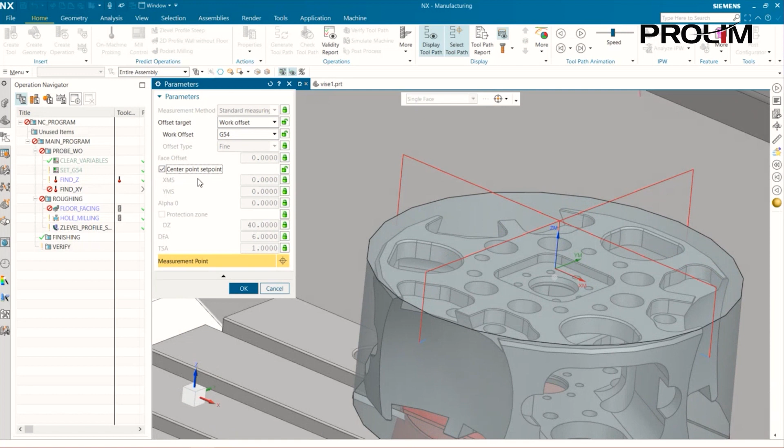And so let's look at some of these options in here. Once again, we can select our work offset, define our work offset that we're going to use. And let's unlock this right here. And we're going to have this be user defined. So we want to use our center point setpoint, right? Once we're done, I'm going to select OK, and we can generate. Now that's all generated.

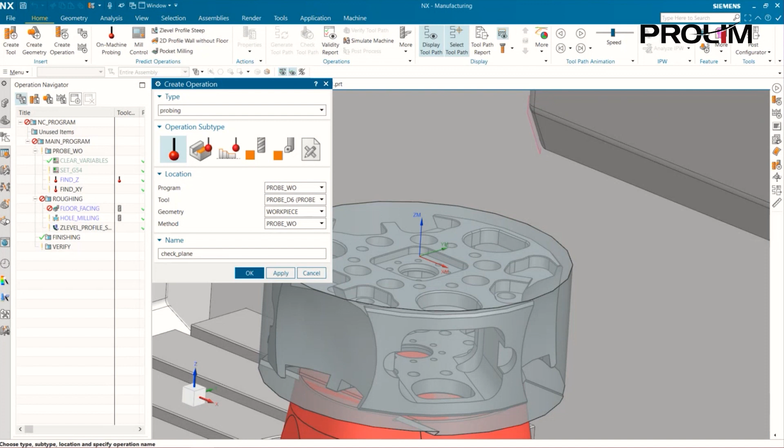So earlier we talked about using a robot tended cell and how you might need to make sure this part is mounted correctly. So if that part wasn't mounted correctly, you wouldn't want to go and adjust an offset. You might want to put some logic in there that basically stops everything, gets the yellow light blinking and gets an operator over there. So let's see how that works. We're going to use the same kind of thing, and we're going to check plane. Remember, you can't use spaces in NX. And we'll use all the same settings in our parameters.

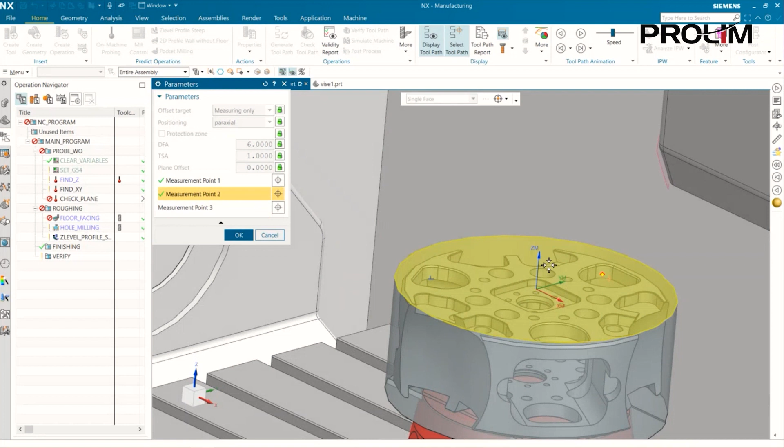All right, once again, our workflow is to specify our geometry. In this case, it's the face. And we're going to come down to this 3D align plane. And once again, you can hover over it and it's going to tell you what it does. All right, once I have that selected, let me go into probing parameters and see what different things we have here. It works off of 3 measuring points. You can't get a plane off of just 2 measuring points. So you're going to have to select each one individually. Get that right. There we go. Make sure you have your green check mark as well. There we go. Select OK.

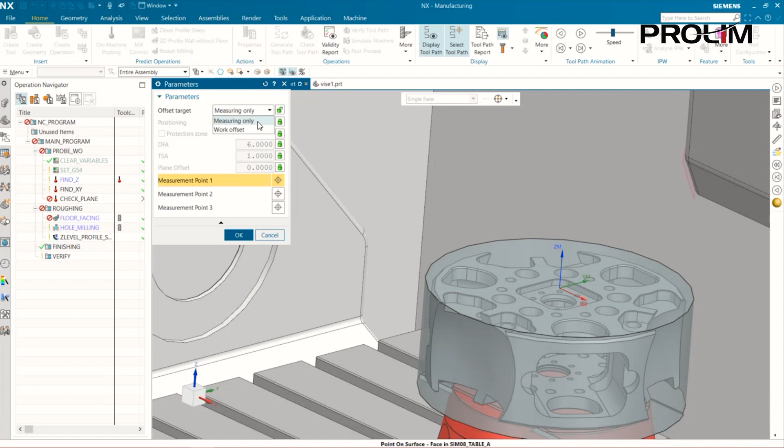And let's look at our probing parameters. So in this case, we have options of work offset or measuring only. Maybe we wouldn't want the table to tilt and we might want to just measure only. Oh, looks like I have to reselect my points. There we go. And we can generate that. I'll select OK. And while we're here, I want to just show you one more thing, is that we can actually run that simulation in the graphics window.

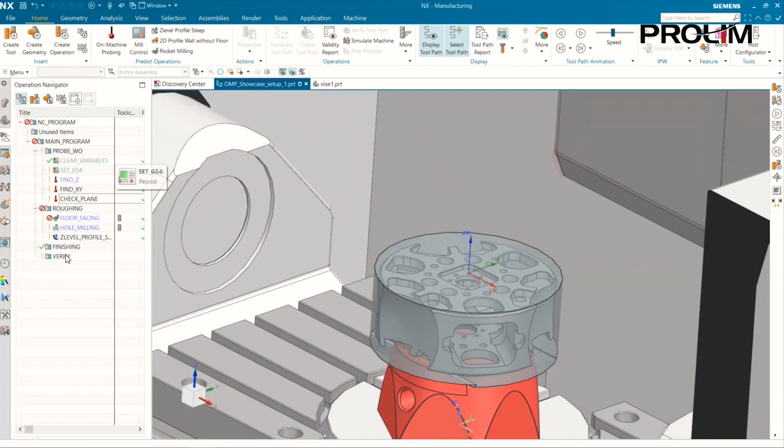So let's talk about some of these mill control operations you see up here. Some of these operations will require you to use a mill control operation, but luckily NX has given us some samples that we can just plug into our mill control operations.

So if I go to create a mill control operation and I need to enter some logic, let me click on notes. I can go ahead and grab this, and this came from the probing cycles templates, and you can see we already have some logic up here. So let's just put any one of them in here. And you can see that populates with your Sinumerik machine code.

And you could put multiple things in here. This is where you could put your logic to actually have the machine stop there and get the operator to come and look at what your probe did.

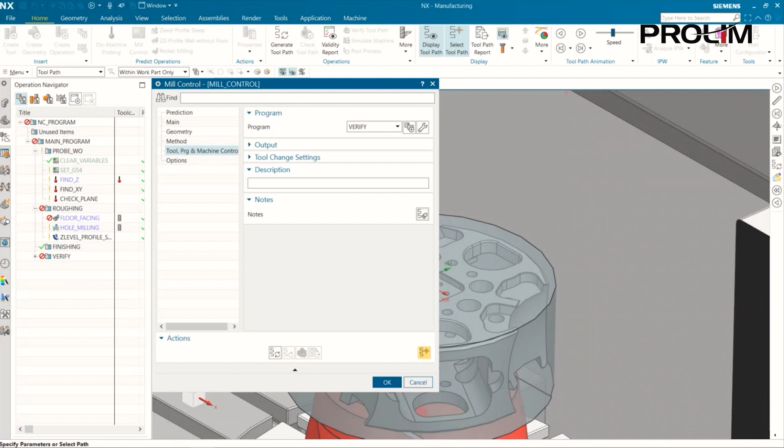All right. So let's get back into our PowerPoint. So we've done all this.

So we saw how this NX on-machine probing module currently works, and Siemens is really leaning heavily into Industry 4.0, and they have been for a while. So they're expanding this offering. This new adaptive machining module looks like it will take more of the work out of our workflow and take care of some of the logic operations.

So setting it up - there's a few things we need to do to get this run correctly in NX. Updating cycles: the out of the box on-machine probing control cycles released in 2306 and later are under maintenance, so they're continuously updating. I think new updates are dropping all the time.

So therefore, it's possibly been created to download this content via Siemens NXCAM Post Hub. So for your post processor, you need to download the on-machine probing post layer. In order to obtain a machine cycle via the post processor, it is necessary to extend the custom post processor. For this purpose, you go on Post Hub and add this layer in your post configurator. The example provided is on the basis of a non-tailored post processor, and it may be necessary to make adjustments, so always check for your correct outputs.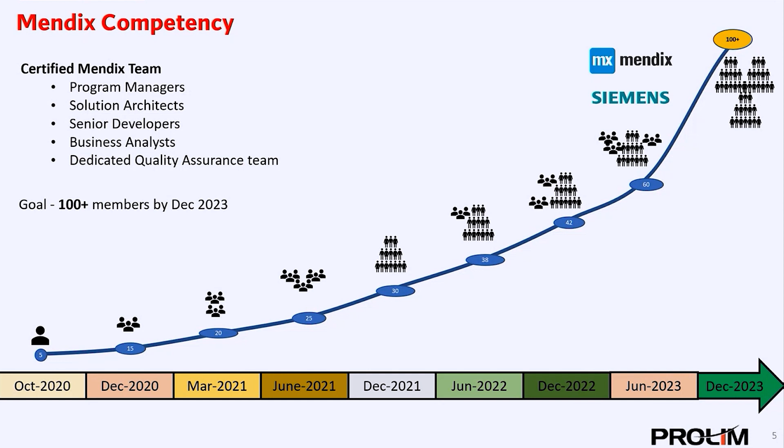So moving on, next we will take a look at the use case where we developed a Mendix solution and integrated it with Teamcenter and NX.

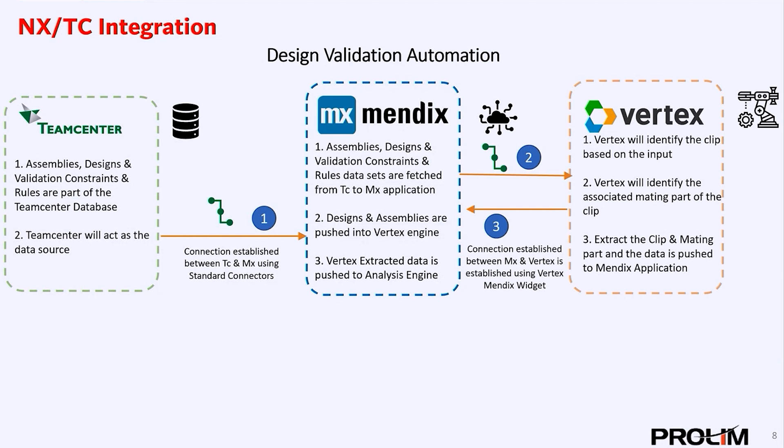This solution is called Design Validation Automation. The main goal of this solution is to automate the validation process of wire harness design using Mendix. Mendix is the center of this application. We have Teamcenter, which is used as the data source in this application. We used a third-party visualization tool called Vertex, which helps you visualize the 3D images, and we also integrate it with NX to do certain analysis on the data.

So here's a quick demo of the application itself: Design Validation Automation. Here is the application architecture, user flow, and high-level scope of Design Validation Automation.

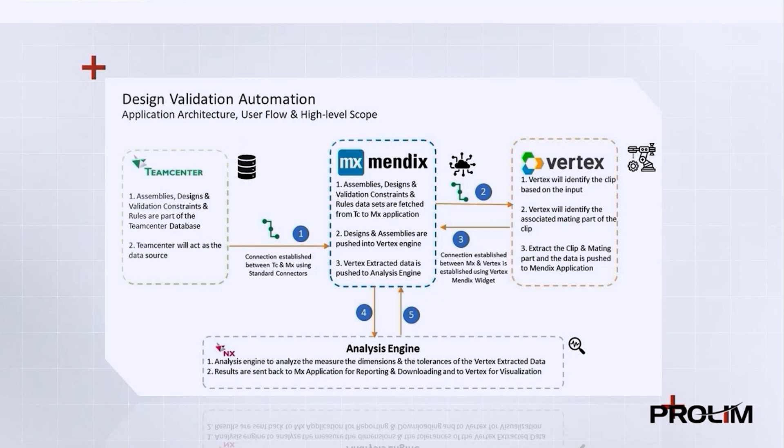Login with username and password. Navigate to Setting Teamcenter Configurations. Click on Login to Teamcenter. This will take you to the login page of Teamcenter. On the home page, click on the Teamcenter icon and it will start listing all the items present.

Search for the item Vertex. Select Door Panel and click on Render. This will now fetch the door panel assembly from Teamcenter and push it to Vertex for visualization.

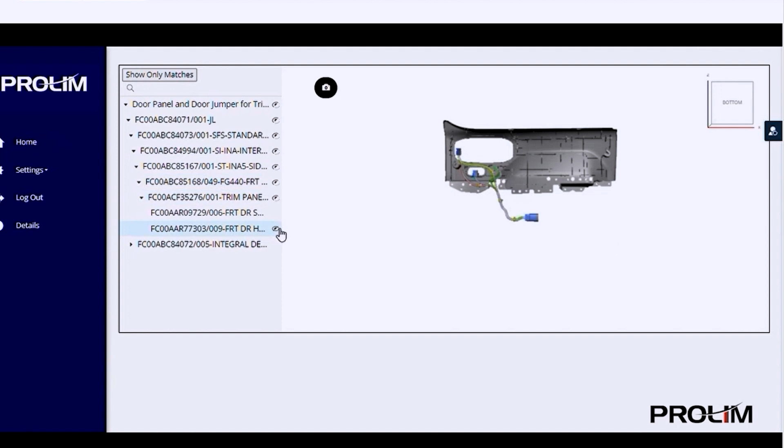Then select the trim panel of the door and the trim panel clip and click on the camera icon for the snapshot. In Vertex, snapshot is not just a screen grab, but it actually gives a reduced BOM and JT format. Click on Home, and on the listing below, click on View Snapshots. You can click on the trim panel clip item and render to look at the snapshot taken.

Go back and now click on Analyze. On click of Analyze, the reduced BOM assemblies are sent to NX for analysis of the clip and panel hole dimensions. The dimensions are returned back to the Mendix application, and based on the rule engine present in Mendix, clip and hole validation is done.

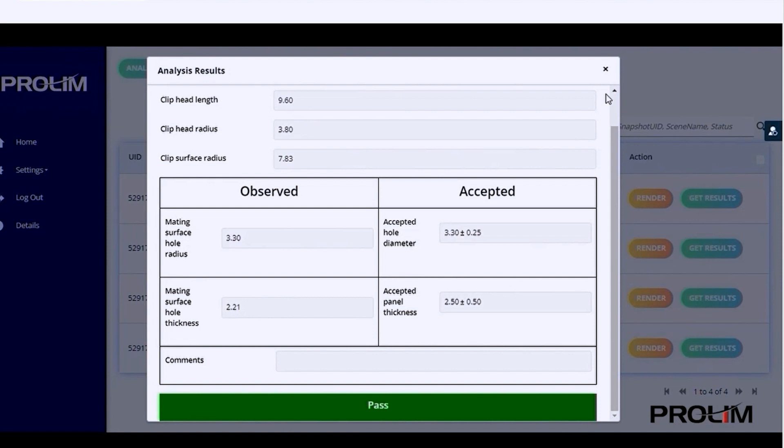Then results of pass and fail are populated, which can be viewed by clicking on Get Results for each reduced assembly. Earlier, for this kind of small door panel, validation used to take about 2 hours at least. In this POC, it takes about 12 minutes overall.

All right, that was a quick look at the demo of our design validation application. Now moving on to a demo of a few other solutions that we developed for various customers. So these are all the applications that are published on our website.

We have a Mendix App Store. So if you go to prolim.com/mendix/apps, you will see all the solutions listed there. And you click on Learn More to read more about the solution. Also, we have a video associated with all of these solutions on our website. So today we will look at a demo of these applications listed here.

The first one would be the 3D viewer. This is a lightweight 3D viewer that was built using Mendix, which can be used to store and view JT files. Vehicle management system.

This solution is integrated with SAP, MES, and a few others. It's a suite of multiple Mendix applications that track the entire life cycle of a vehicle from production all the way into dealership. This also includes a parts tracker application, which has the ability to scan and track the various parts of a vehicle.

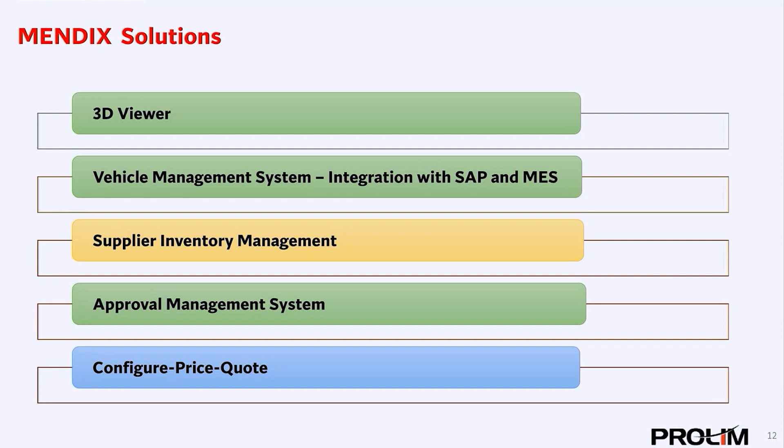So let's take a quick look at the 3D viewer application. The 3D viewer application is a lightweight visualizer that lets the end user upload, store, operate, and visualize the 3D JT files and 2D drawing files.

The user can open the model and rotate, pan, and zoom the model to see the details. The section view provides a view from various angles. The user can see the hierarchical tree view of the items that form a model.

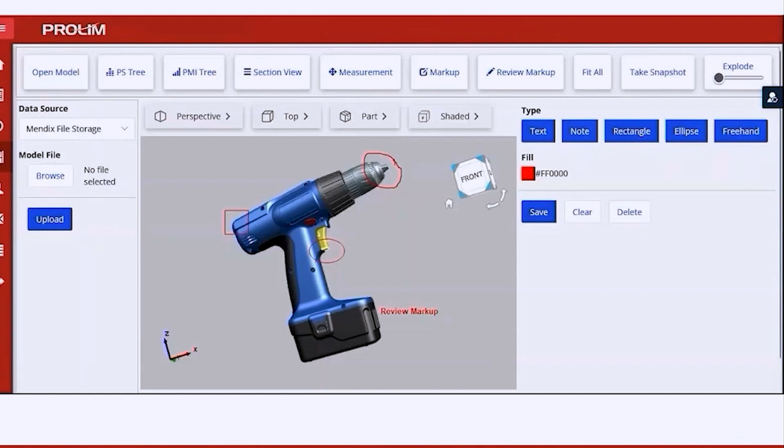Toggling the tree node allows the end user to control which model parts are loaded into the viewer. The user can delete, add, and clear section planes to the model on desired direction axis. The markup feature allows the user to create a 2D markup on a model, annotate, draw, or add a comment, and save the annotated screenshot. The toolbar item selection mode provides the ability to select a model, part, edge, face, and body.

Okay, so that was a quick demo of our 3D viewer tool, again developed using Mendix. Next, we move on to the vehicle management system. As I mentioned, it's a suite of multiple applications that were put together and is an excellent use case of how easy it is to use Mendix to integrate different systems in your organization. This solution was implemented for a large EV manufacturer.

Let's take a look at the solution we developed to automate and integrate vehicle manufacturing operations. We implemented this solution for a large EV manufacturer. Vehicle Management System, VMS, consists of multiple Mendix applications integrated with non-Mendix applications such as MES, SAP, and a few more. The VIN generator application integrates with the MES application and generates a unique VIN for every vehicle manufactured.

The parts tracker application manages the parts-to-vehicle mapping through a QR code scanner. The QA application is integrated with the parts tracker application to receive the information of the vehicles.

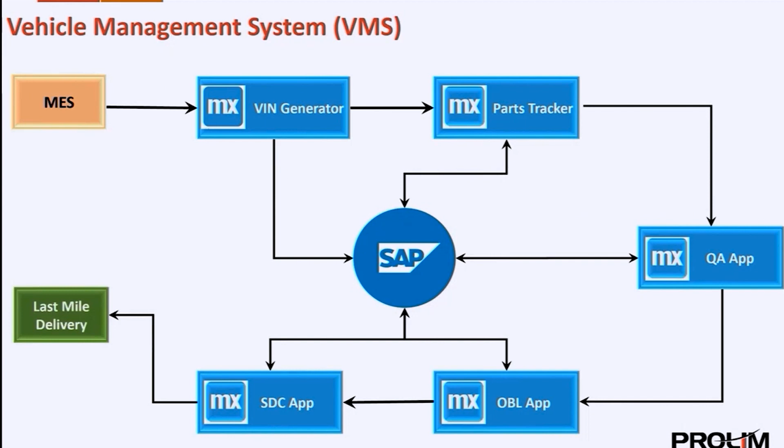In this solution, we also integrate with two non-Mendix applications to ensure delivery of vehicles to customers, MES application and last mile delivery application. A quick overview of the vehicle parts tracker application. The parts inventory dashboard, VIN inbound tracker, various entities like material master, VIN master, etc., and the Excel importer. All right, that was the vehicle management system integrated with multiple different external systems.

Next, we'll move on to the supplier inventory management system. This one helps you manage suppliers, parts, and plants at various locations. It includes stock inventory management as well. Supplier inventory management system allows the user to manage suppliers, plants, and parts. Approval is required for any change to supplier, plant, or parts. Templates can be used for bulk uploads. This solution integrates with Power BI for the dashboard.

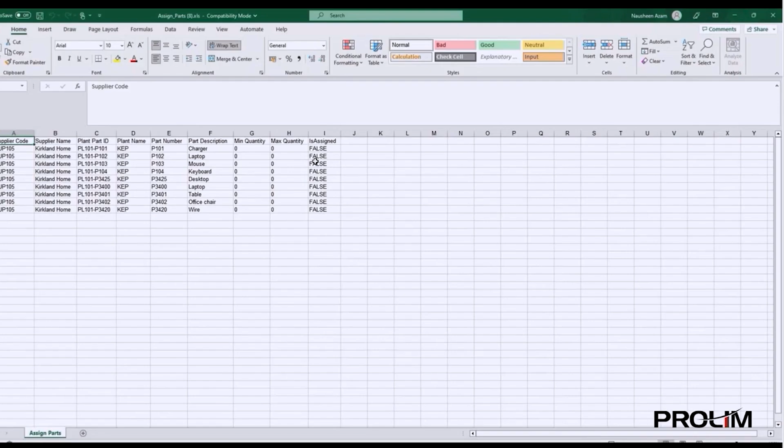Let's take a look at the application. Here are the various entities for supplier, employee, external user, plant, and parts. Let's add a new supplier, assign the plant and part. We can download supplier-specific templates for bulk upload, update the data, and import it back into the system. The approver can approve or reject parts on this dashboard.

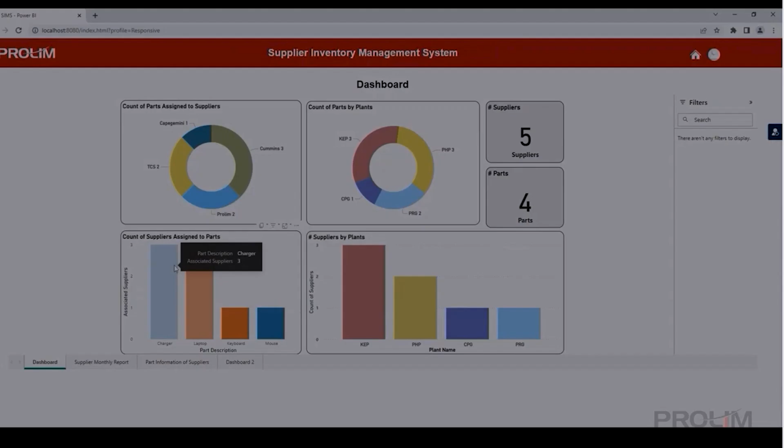Here, the user can check and update the stock for parts at different plants. The Power BI dashboard shows various counts, such as counts of parts assigned to suppliers and count of parts by plants. All right, that was a quick look at our supplier management system.

Now moving on to our approval management system. As I mentioned, this solution can be used for any approvals across the organization for managing the approvals. Approval management system. This solution can be used for different types of approvals, such as reimbursement or specific types of payments. It allows for up to 7 levels of approval. An email is triggered for every request. The approver can approve, reject, or revert directly from the link in the email.

The approver can delegate approval authority to a specific person for specific dates. An automated email reminder is sent on a daily basis for pending approvals. The dashboard shows the pending approvals for each approver. Let's take a quick look at the application. Team approvals is a feature where approval can be sent to a team instead of a specific individual.

Let's create a new approval. Add all the details. Attach any documents needed for approval. Select the approvers and submit. Here is the delegation form. Let's take a look at the dashboard, which shows all pending approvals for every approver. You can click on any one to see the details. The dashboard also shows requests created by the specific user. So that was the approval management system.

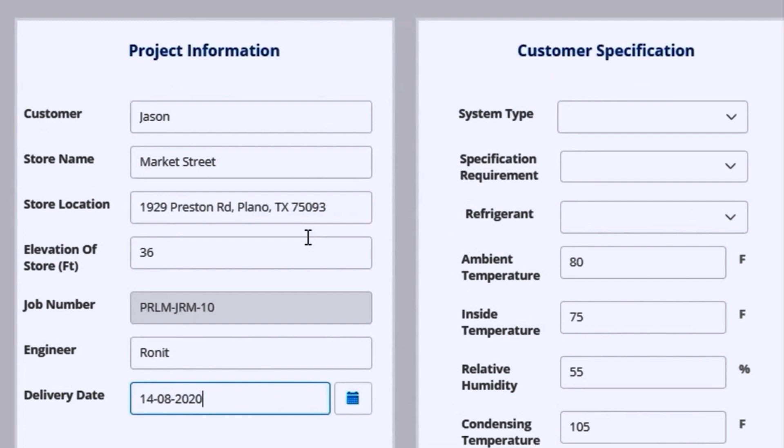Sales representative will input customized specifications of the product, quantities, and the optional features as input and generate an optimized proposal based on the selected parameters. This solution is developed using Mendix in context of an industrial refrigeration system, but can easily extend to any other products. This form captures customer details such as customer name, location, and delivery date. The second section captures the system details.

In the case of refrigeration systems, it captures parameters like ambient temperature, relative humidity, and target load. Additional details are captured in the bottom section, such as compressor manufacturer, voltage frequency, and others. The sales executive can also optimize the current proposal based on the following parameters: cost, lead time, and horsepower.

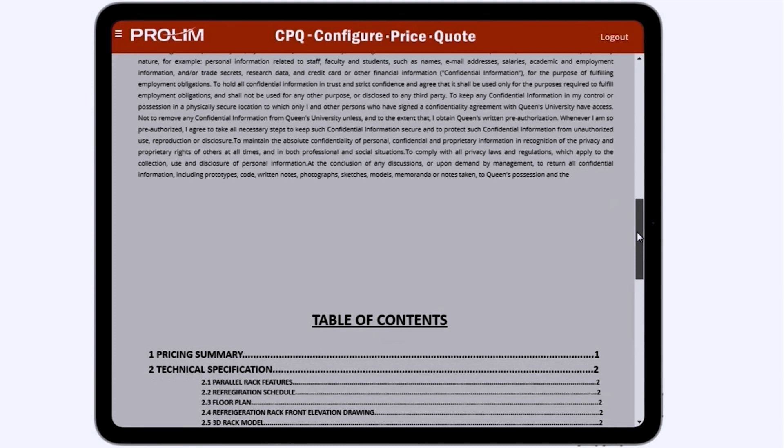This application integrates with Teamcenter and automates the generation of the proposal that includes the specifications of the finalized requirements, the pricing policies of the components, discounts involved, the 3D images of the components and the product. As you have seen, CPQ by Prolim is a great sales tool to generate accurate pricing proposals real time within minutes. All right, that was the CPQ application.